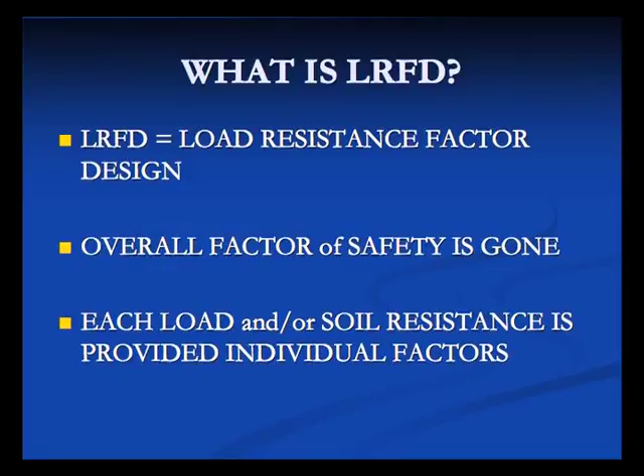Well, the design process isn't the same anymore, both for structures and for geotech. The way the design process works now is, as we're designing that foundation, different resistance factors are applied. When we don't have great confidence in something, that gets a smaller resistance factor, thereby reducing the load that we put on the foundation. But in areas where we've got good confidence in what we're looking at, that resistance factor is bigger, meaning we can put more load on it. So it's a similar process, but it's just at a different part of the design stage.

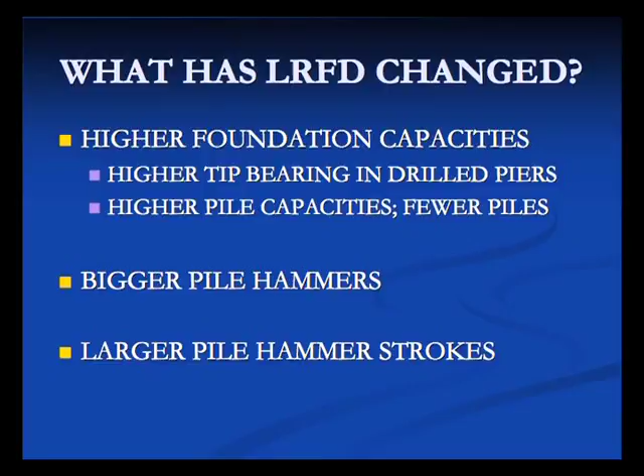How does this affect you guys? Well, as I've said, if you've looked at plans from a recent letting, what you're going to notice is we don't have 60-ton piles anymore. It'd be a rare situation unless you get a bridge maintenance job or a job that sat on the shelf for a few years. What you're going to see is the notes on plans would say piles are designed for a factored resistance of whatever, and it might be 120 tons on that pile. The following note would then say we're going to drive that pile to a driving resistance of whatever, 180 tons or 200 tons. So we're driving these piles a whole lot harder than we ever used to.

When you drive a pile to 200 tons, it takes a big hammer to drive that pile. When I first started 6 years ago with the state, it wouldn't be uncommon for a contractor to submit a Delmag D12, which is a 2.5 kip ram, and a Delmag D19. Well, as LRFD has come out, the D12 goes away because a 2.5 kip ram is not enough to get anywhere close to 150 tons on the pile. So with higher pile loads, you see bigger hammers, and with bigger hammers, you see bigger cranes.

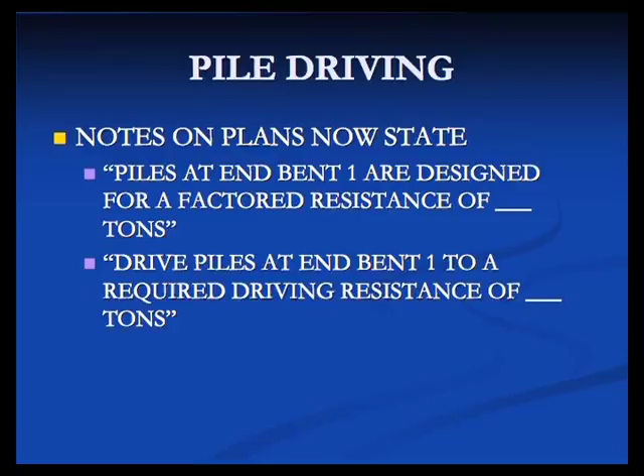It takes a lot more stroke, even if you've got a Delmag D19-42 4-kip ram. It takes a 7 or 8 foot stroke to proof out that pile to 200 tons, if that's what we're looking for. Okay? So your job is going to change if it hasn't already. Those are the new notes that we use, as I stated before. Nothing is bearing anymore, it's all resistance. Same meaning, different words.

The skinny on all of this is, if you look at that first note that says the foundation's designed for a factored resistance for piles, if you take that factored resistance and divide by 0.6, you get the driving resistance. Okay, so that's the skinny on the resistance factor. And you might say to yourself, well, piles used to be designed for a factor of safety of 2, so shouldn't that resistance factor be 0.5 instead of 0.6?

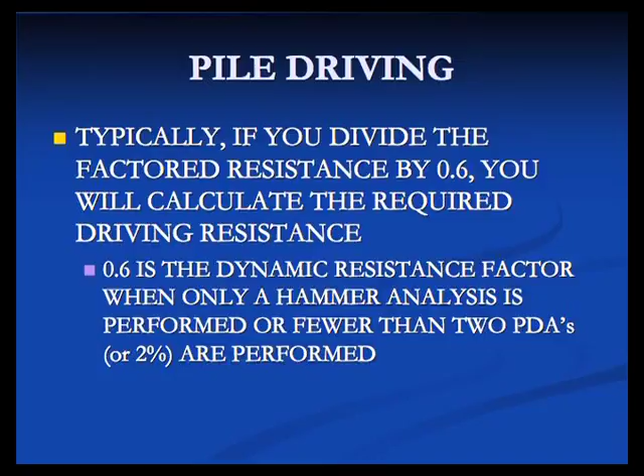Well, a lot of research went into that, and AASHTO set that resistance factor. Now, we varied away from AASHTO a little bit and are using that 0.6 factor. And just so you know, a lot of probability and statistical analysis was done to come up with that 0.6. Ultimately, it's the same as we've always done it, but it just looks a little different.

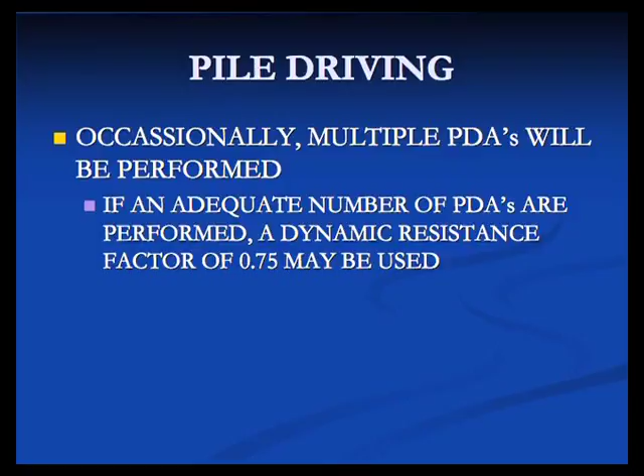If we run PDAs, the current 5th edition of AASHTO prescribes at least two PDAs, or 2% of the piles, and we have very few projects where 2% will be more than 2. So if we run 2 PDAs, again, it comes down to a confidence level with those resistance factors.

So if we've got, say, 12 end bent piles for a job, if we drive 2 of those, we've got pretty good confidence on the remaining 10, that if we use the data from those PDAs, the other 10 are just like what we did with the PDA. So our confidence level goes up, and our resistance factor goes up as well, or our factor of safety can be reduced, and so we use a resistance factor of 0.75, which means we run 2 PDAs.

If we incur the cost, roughly around $3,000 for a PDA, what that buys us is a little more capacity, or the same capacity with less risk of damaging that pile. Okay. In North Carolina, when you're driving piles, there are typically 2 conditions.

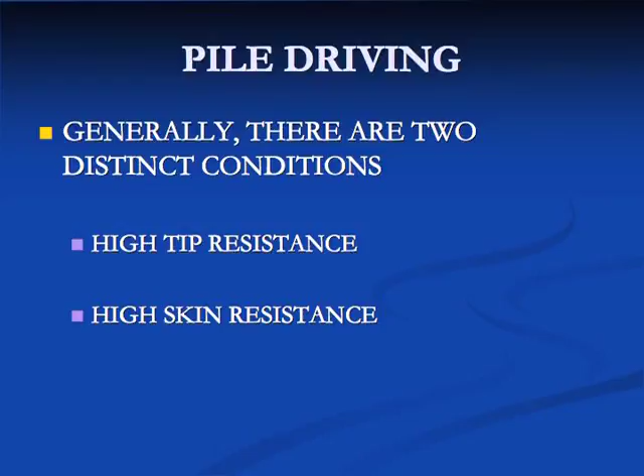You've got high tip resistance conditions, which is really my part of the state, the western part of the state. Most of Division 8 and everything west, 7, same way. Anywhere that you don't have coastal plain, they tend to be tip resistant piles. From 8 and east, all the coastal plain divisions, they tend to be skin friction piles. Big sections, pipes, square concrete piles, they're called displacement piles. As you drive them in the ground, they're displacing material, so you develop a lot of skin friction by doing that.

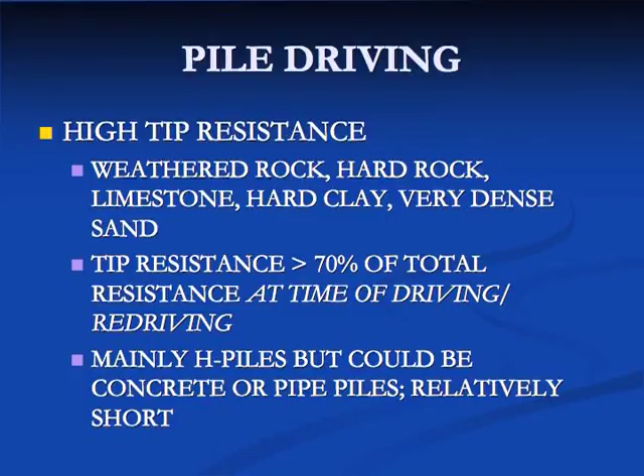Tip resistance piles tend to be driven to something hard, weathered rock, really hard clay, dense sands. They tend to be relatively short piles. In my part of the state, piles will tend to be from 10 feet to 30 feet. When you get longer than that, it's a rare condition.

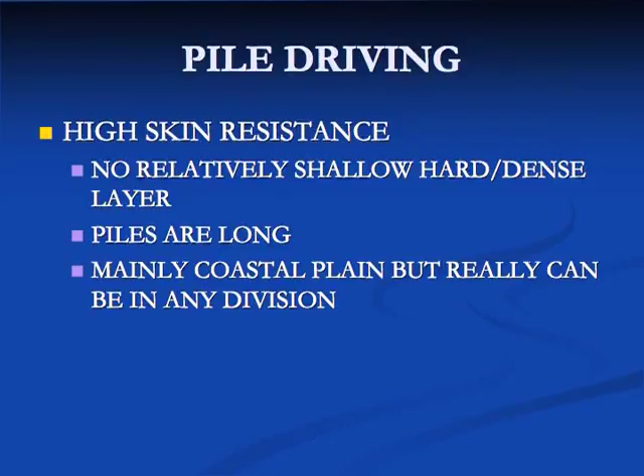The eastern part of the state, coastal plain sections, they tend to be skin friction piles, really long, 70, 80, 90 feet long. It takes that much pile to start displacing the material to develop all that skin friction, plus the stiffness of the soils in the coastal plain tends not to be as high, so it takes a really long pile to get the tonnage that we're looking for.

Thing to keep in mind, west and east in this state is fairly distinct, but there are places, I've seen Stokes County where we had 80-foot long piles, nothing to tip those in. Hendersonville, over in 13, same situation. So just because you're in the western part of the state or in Piedmont ground doesn't mean that you're not going to end up with skin friction piles.

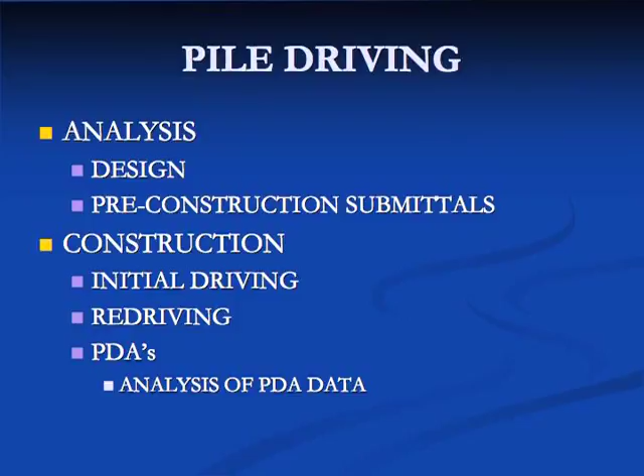Pile driving is broken into the analysis side, the design phase, where you guys really never see the work going on. You've got pre-construction submittals, the hammer pile driving system that the contractor submits, and then the construction side, which you guys are always involved in.

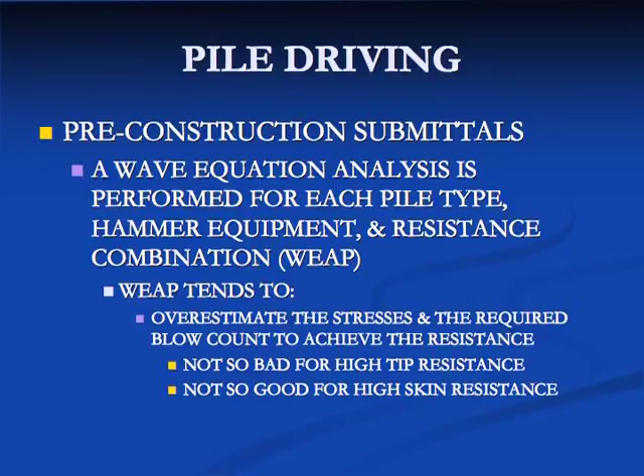Once the contractor wins a contract, typically one of the first submittals they make to us is the hammer submittal. And that hammer submittal will list at least one hammer, typically two. And it's everything about the hammer pile driving system. It would include the helmet weight for the hammer, hammer cushions, and if you're driving concrete piles, it may have a pile cushion, a plywood cushion for driving concrete.

We use a software called WEAP to look at that pile driving system. And it's not only the hammer, but the weight of the pile also figures into all this pile driving. If you've ever been on a project where you had 20-foot piles in bent one and 80-foot piles in bent two, those two driving tables are totally different. Well, an 80-foot long 12 by 53 is tremendously heavier than that 20-foot long 12 by 53.

So if you imagine running into something that weighs 4 times as much, it takes a whole lot more energy to move that. And that's why those two driving tables are so much different. That hammer has to work a whole lot harder to shove that 80-foot long pile into the ground.

WEAP is made by a company called GRL, who have developed research for the last 40 or 50 years in pile driving, using a database full of hammers and their typical operations and everything else. When a contractor submits, say, an ICE I-19 hammer to us, we go in that database and throw it into the software. That software will analyze that hammer operation and provide us the driving table that we give to you guys.

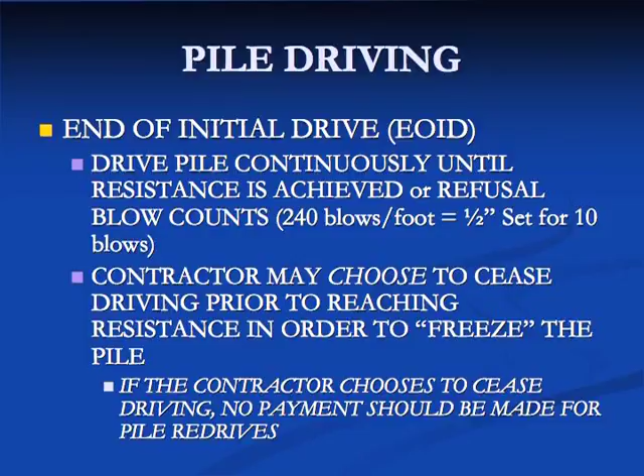Okay? Let's say we had a contract where the average pile length is 40 feet. There may be times that a contractor, when he gets to 40 feet, may choose to stop. Let's say we don't have bearing. The contractor chooses to stop and come back the next day and try to achieve bearing, letting that soil set up, trying to freeze that pile. If the contractor chooses to do that, then we don't pay the contractor to come back the next day and redrive that pile. That does not constitute a pile redrive, correct? Everybody agree with that? Contractor can choose to stop. If he chooses to stop, that's his choice, and we don't pay for the pile redrive.

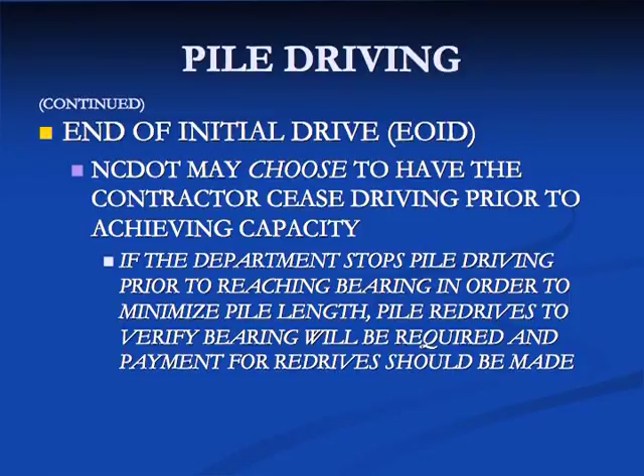On the other hand, again, same contract, 40-foot long piles. If we get to 40 feet and we're getting nowhere close to the sets for 10 blows that we're looking for, we can step in and ask the contractor to stop driving. Okay, we're trying to save money. We're trying to hit the contract length. We don't want the residents to suffer project overruns and all of that. If we step in and ask the contractor to stop, then we're going to say we're going to wait 24 hours and come back and redrive this pile. If we do that, then when we go back and drive that pile, we will pay him for a pile redrive. Okay?

Are you seeing more redrives up here in this part of the area, Dean, because of the bigger hammer? No. I would venture to guess that at least 90% of the projects in all the divisions represented here, until you get into part of Division 8, where you're into the coastal region, most of the time we're driving to weathered rock or something. But you had the job up in Stokes with 70-foot long, 80-foot long piles. Are you seeing damaged piles from the bigger hammers once you get to rock?

No, but understand too that when we look at a hammer submittal, let's say we've got 10-foot long piles driven to hard rock. My philosophy is I would prefer a contractor at that point to submit a D12, not a D19-42, because if you can get a pile to rock, we don't really care what the blow count is at that point. We're calling it good, able to get any kind of capacity we're looking for. So we would rather have a smaller hammer with less potential to damage that pile. A really small hammer at that point is a good idea. So we look at things like that to make sure we're smart in driving the pile.

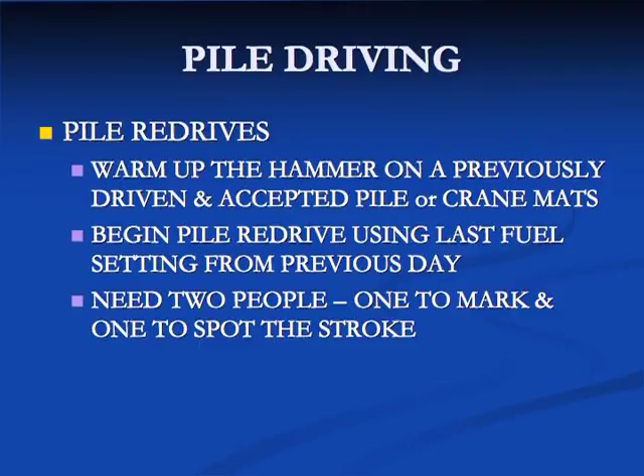We'll talk about pile redrives. This is typically for H piles that are driven and have nothing to stop that tip. A lot of times you'll be in a pile redrive situation. The thing to keep in mind when you're trying to redrive an H section is if you hit that pile more than 3 or 4 times with strokes that aren't anywhere close to what you're wanting to see, you've wasted that opportunity and you're going to have to come back the next day and do it all over again. So the most important aspect of a pile redrive is making sure that hammer is smoking hot, ready to go when we try to hit that pile.

The best way to do that is if you finish the previous day's operations. We're sitting on an end bent, got 6 piles. We've driven all 6 of them, 3 of them got bearing, 3 of them didn't. The best way to warm up that hammer is to go to those piles that we accepted the day before and set that hammer on top.

Now, your job as the inspector is to kind of know at the end of the previous day what our fuel pressure was for that hammer. And when I talk about fuel pressure, do y'all all know the little jack that sits out there and he pumps that thing up and it's got the dial gauge on it? Okay. The higher that pressure is, the finer the fuel into the chamber, the explosion chamber for the hammer. The finer the fuel, the bigger the explosion. That's why the higher you pump it, the higher that ram is.

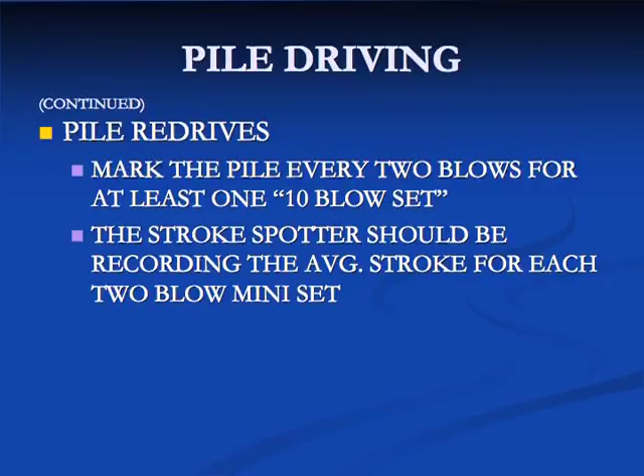But we're going to tell the contractor that we want to mark that pile every 2 blows. Okay? We're still going to drive it the 10 blows that we normally would, but we want to mark it every 2 blows. Your job as the stroke spotter, if you take my advice and you're spotting the stroke, is every 2 blows that you see, you're averaging those strokes and you're writing them in your diary. Okay? So when that 10 blow set is done, you can walk back over there and measure and write the 2 blow sets out beside those strokes.

Okay? If by chance, and this would be a rare condition, consider yourself lucky at this point. If you get to the end of the 10 blows and you look at your driving tables for that given stroke, and you find out that the set for 10 blows that you just got on the redrive is less than what's in that table, great, we got bearing. Okay? Just like any other drive. I'd venture to guess that 95% of the time that isn't going to happen. Typically, we're not that lucky. If we're in a redrive condition, there's typically nothing anywhere close to the toe that's going to stop that pile. So

what we're going to do then is we're going to look at stroke and what our penetration or set is for each of those 2 blows. And the way you figure out what a 2 blow set is, you've got a 10 blow set, and let's say you look at the table and it's 1 7/8 inches. If you take a 10 blow set and you're trying to convert that into a 2 blow set, you divide 10 by 5, and you get a 3/8 inch set for every 2 blows. All we did was broke that 1 7/8 inches into 5 sets. Okay.

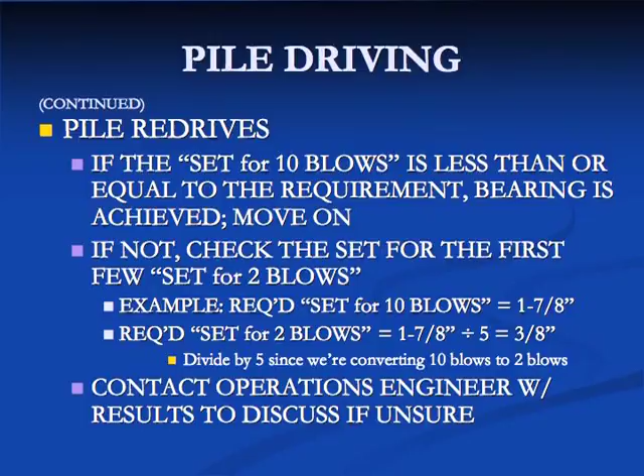What you're going to find out is if you're looking for a 3/8 inch set for 2 blows, in the first 2 blows, in a given stroke, you're going to see maybe a 1/4 inch penetration. Okay, so that's less than 3/8. The next 2 blows, blows 3 and 4 in that 10 blow set, it's probably going to be 3/8. But after you hit that 3/8, it ain't going to be 3/8 again. It's going to be half, 5/8, 5/8, 5/8. So if you added all those numbers together, we wouldn't get to the 1 7/8. It would not look like a passing bearing check.

But what you need to do at that point is call the bridge construction engineer, call me or Chris, whoever you're supposed to contact. Have that data ready. What your stroke was in the first 2 blows, what that penetration was in the first 2 blows, so on and so forth. We'll make that decision. I won't saddle you with that requirement. We'll make that decision. You might say, well, that's a little bit hokey. That's like some black magic you guys are pulling out.

Well, what you got to understand is when a PDA is performed, that's exactly what is done. If you've ever been part of a PDA, you might do 2 or 3 10-blow set checks. When that data comes back, they're not looking at all 10 blows. They're grabbing one blow count out of that set check and saying, this is our representative capacity. Okay? That's exactly what we're doing.

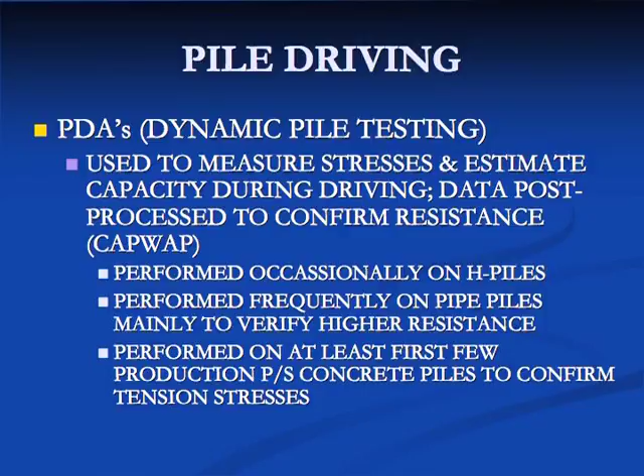When we go into a pre-driving analysis of the hammer system, like I said, we've got a database of hammers. We choose that hammer, and that database is the collection, for any given hammer, of what GRL has seen that hammer do over the years. Okay. We also estimate soil parameters in that analysis because the dirt matters. What we're driving it through matters. What a PDA helps us do is refine, make those soil parameters better. When we get better parameters, we get better driving tables.

And if you can imagine, as I told the group yesterday, not every Delmag D19-42 operates like the next one. Just like you and your buddy might have the same vehicle and they don't operate the same. Well, that's all a hammer is, a combustion chamber. So what the PDA helps us see is if I take a 4-kip ram out of a D19 and I raise it 8 feet, 8 times 4, 32, that's supposed to be 32 foot-kips of energy hitting that pile. But the PDA tells us exactly what that energy was, and it's not going to be anywhere close to 32.

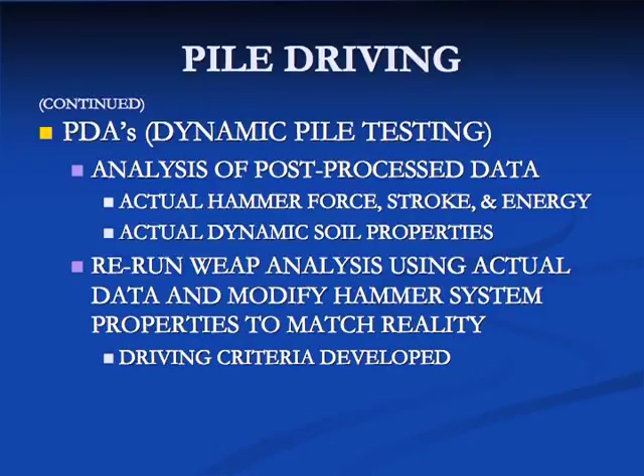So if we get into a situation where we try to drive a pile, we don't get bearing, we try redrive, we don't get bearing, we come back out and we run a PDA, you might find out that if we gave you a criteria of a 7-foot stroke and 48 blows per foot, when we run that PDA for that 7-foot stroke, it might be 35 blows per foot. Again, we overestimated previously. PDA helps us get it right the second time around.

Okay. So here's your typical construction summary. For H piles, I think across the state, Chris's region included, the process is for an H pile, we're going to try to drive to get the resistance or get the bearing that we're looking for. If we don't get that bearing, then we're going to tell the contractor to stop. We're going to come back at least 24 hours later.

We're into driving at 4 o'clock in the afternoon. We might come back at 10 the next morning and hit them again. Okay? We're going to redrive them using those 2 blow sets. If we then by chance don't get the redrive bearing that we're looking for, then we're going to have to call the PDA out there because the PDA will let us analyze truly what the dynamic capacity of that pile is, okay?

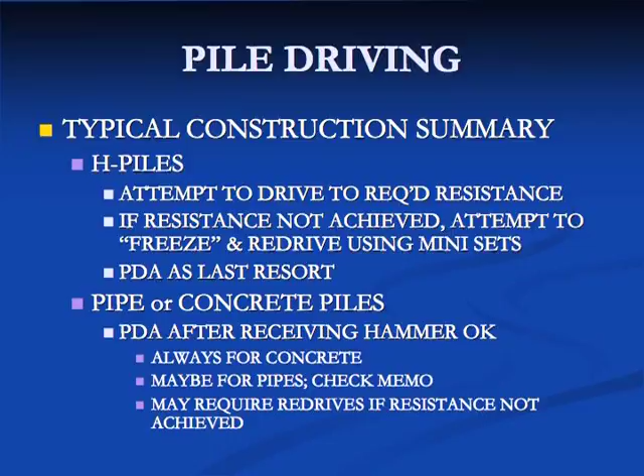Maybe for pipes, again, checking our memo. If you get a memo that has a driving table on it, you're not running a PDA, you're driving those piles. Okay. Those two, pipes or concrete, may require redrives. If you're in a redrive condition with a concrete pile or a pipe pile, the two blow sets won't matter. Those piles won't take off like an H pile will. So we're into the 10 blow sets. Okay?

Does anybody have any questions about pile driving? I'm going to try to do Chris's portion of this as best I can. Does anybody have questions about pile driving? Can you touch on, you may have, I'm sorry, minimum tip? Could you touch on that a little bit? Just briefly. Briefly, yeah. Because these guys may not have as much. Lee's just telling me he didn't see that a lot in his plans, but we've got that more in our area. But I just want to make sure they understand that and look for it in their plans.

How many folks have ever had an interior pile bent on a bridge? On those bridges, there's always a note on plans that says not only drive the piles to a certain resistance or bearing, but also drive them to a minimum tip elevation. I'll talk a little bit about it here. These are all Chris's pictures, mainly the eastern part of the state. I think he's got some Division 7 pictures in here.

But where the minimum tip comes in has nothing to do with axial capacity, vertical capacity. It has to do with the fence post bending over condition. So part of the geotech analysis for a pile bent is how far that pile has to get in the ground. Structural design provides us not only the vertical load but the horizontal load on that pile. So geotech looks at how far that pile has to be in the ground before it wants to bend over, just like a fence post. So that's where the minimum tip comes in.

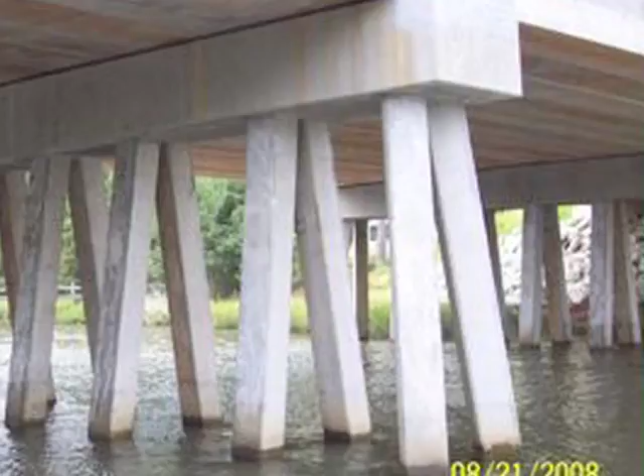But in the design process, because of a hard layer underneath, they couldn't get the big 16-inch concrete pile deep enough for one row to work. So they had to put essentially a frame in there, double row battered piles, to help with that pushover that bridge wants to put on those foundations.

Lateral load on a bridge comes from two different directions. If you look at a bridge in elevation, the wind or water pushing against that bridge. That direction through the bridge tends not to be the bad direction. The bad direction tends to be along the bridge, and where that affects things are your bearings and beams sitting on those seats and getting those bearings in the wrong position, essentially.

Those forces, and you might say, well, where does that force come from? That force comes from the tractor trailer rolling across that thing and locking up its brakes, trying to shove that bridge along. So that direction, from a structure standpoint and a geotech standpoint, tends to be the direction that gets looked at the most. Through the bridge, you've got that bent sitting there, and that big frame that helps minimize that kind of movement.

Okay. You got 12-inch pipe piles at an end bent. How many folks have ever had pipe piles at an end bent? That's a rare condition. Looks like they're getting ready to build an MSE wall out front because you can see all the piles sticking up.

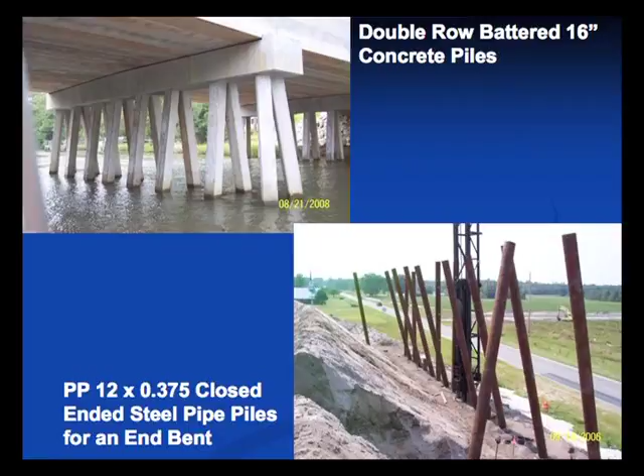Another double row condition. This time it's H piles, battered. Again, limited penetration for that H pile, forcing them into a double row condition. Those piles are galvanized.

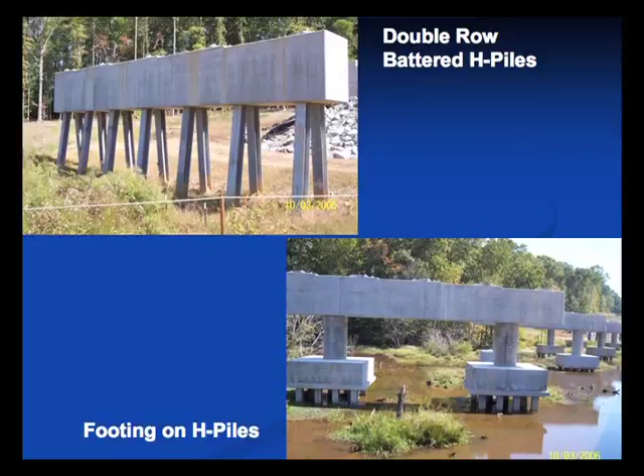Down in the bottom right, you've got a footing on H piles, and it's really critical to make sure when you're driving those piles that you maintain good alignment. That means we need those leads to be checked for plumbness both directions.

Because especially when you do a footing on piles in conditions like this, you don't want to get a pile out and not be able to get your platform footing form on top of that. So it's real important to make sure that the contractor's doing his job, making sure he's plumbing those leads in both directions.

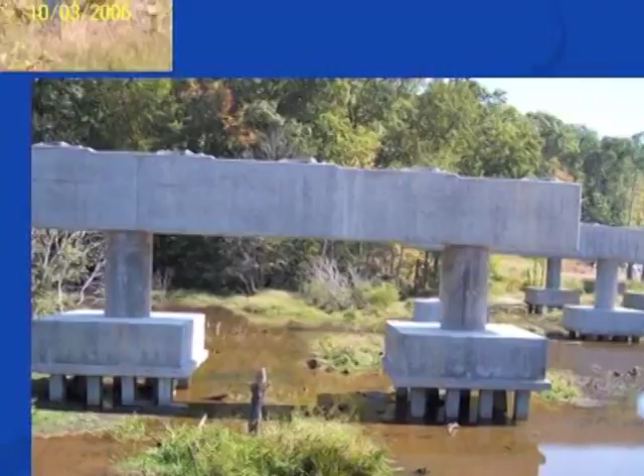Dean, that little slab on the bottom of those footings there is really not something that's in our plans. That was something the contractor proposed and got approval to do. And so it was a sacrificial slab they decided to use for their false work, or for the bottom of the footing.

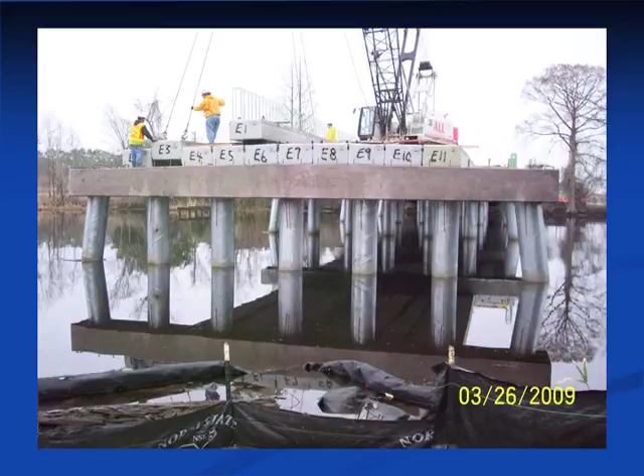The water elevations fluctuate quite a bit, so if they had to use an extensive set of false work down there, it was going to be difficult if the water level came up to get that false work out. So they came up with a method to put that slab in and leave it in place. So it's got some reinforcing steel that actually ties up into the footing. We've used that in a few places in our area.

This is an example, top-down construction, big pipe piles. How many folks have ever been an inspector on a top-down construction job? It's real common where Kevin's from, where Chris covers. And the way it works is the contractor drives his interior first bent piles, forms that cap, drives his end bent piles, gets that cap done. This is a cored slab bridge, and he sets his cored slabs across those two bents, right?

He's got his end bent number 1, he drives his crane out onto the bridge at that point. He drives bent 2, he progresses across the bridge that way. The last bent he drives is end bent 2. Okay? What that allows is, one, it's pretty fast. I mean, it's a good way to do it. It saves us money, saves the contractor money. He doesn't have to build a work bridge, causeways, or anything like that.

I think you may see a lot of this. I don't know if you guys have heard, but we've got sub-regional tier bridges now. If you've been on a bridge where we don't have the typical reinforced bridge approach fill with all those different layers of fabric, we're putting a little wedge of stone underneath our approach slabs. Those are called sub-regional tiers. Those are low traffic volume, low risk bridges that we're trying to save a little bit of money on.

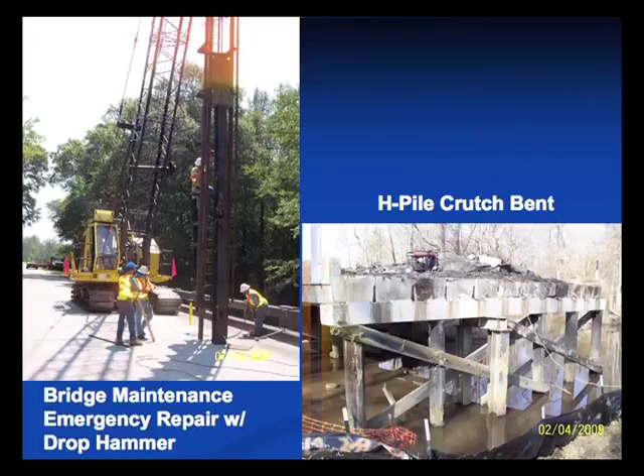These are 2 pictures of bridge maintenance work, and bridge maintenance tends to do things a little bit differently. They don't really have the capabilities to go out and rent a big diesel hammer, and a lot of bridge maintenance areas have drop hammers. We don't allow drop hammers on TIP jobs, but when bridge maintenance has a bridge that they need to shore up just a little bit at a bent, they'll bring out a drop hammer, and the way a drop hammer works is exactly the way it sounds.

They lift up this big ram with the crane, and they cut loose the brake, and it falls and drives, in this case, an H-pile. And so they're building a crutch bent. They've got piles going bad, maybe timber piles that are rotting. So they go in there and drive piles either side and build a little crutch underneath that bent to try to get 20 more years out of this bridge.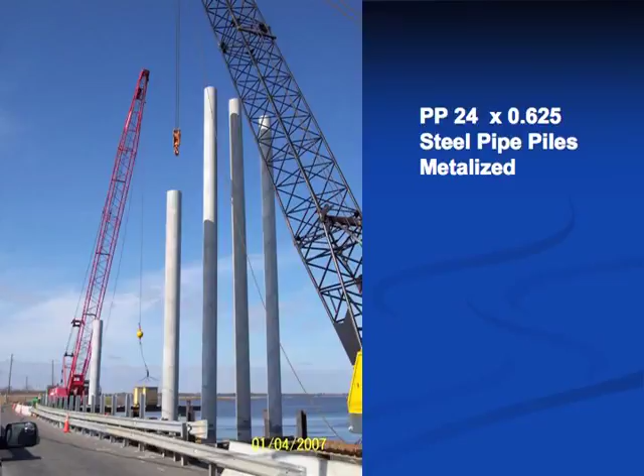This is an example of how long piles tend to get down at the coast. Big 24-inch pipe piles. These are metallized piles. Way down east where you have to deal with saltwater, brackish conditions, piles tend not to be galvanized. They tend to be metallized, which is a harder, better corrosion protection for piles.

Randy, do you know how much longer metallization provides than galvanization? I do not.

I know it's quite a bit more expensive, but it is much more durable. Yeah. Very difficult to repair. There's not very many people who come in who can repair them. Metallization is sprayed on, where galvanization is dipped.

When the steel manufacturer provides the piles to the galvanization company, they've got long vats of zinc alloy, and they take that pile and they dip it in there, and that's what provides galvanization. But metallization, it looks like textured ceiling to me. I mean, it's sprayed on. It kind of looks like that.

But if you can imagine driving a pile through the ground, you need a coating that kind of resists all that abrasive action that's going on around that pile. Down east, again, you tend to get really long piles, and this is an example Chris has for installing piles initially with a vibratory hammer.

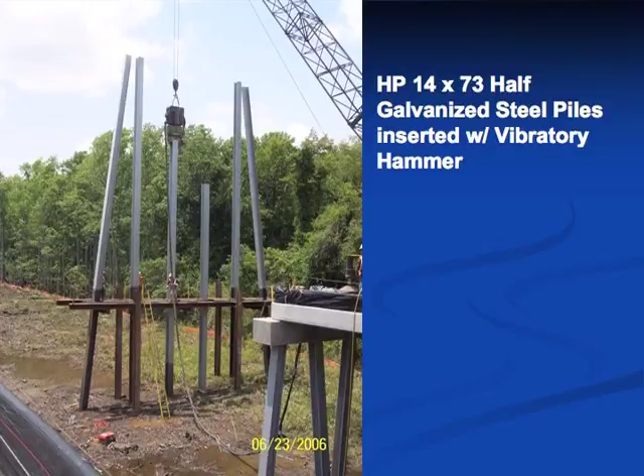The contractor would take those two different piles, splice them together, and there should be a note on the plans that requires the contractor to get the bottom of the galvanization to a certain elevation in the ground. Okay? And that elevation is deep enough in the ground that the black steel won't corrode, and we still have protection for what's exposed.

Typically, when we get a project like that, let's say the 20 foot's a bad example. Let's say we've got 60-foot long piles. That galvanization elevation that we need to get to may not be well known before we start driving the pile. And so we may recommend to the contractor, we can't make him do it, that the first pile he drives, let's say the middle pile in a bent, be fully galvanized so that we can figure out exactly where we're going to end up. That way we don't screw up the first one.

If we drive that first pile and he's got in his mind that he knows exactly where everything's going to end up, we drive that pile and the galvanization, we've got black steel 5 feet above where it's supposed to be. We've got to then extract that pile and then go at it again.

Okay. You want to talk about pay items for that? I think with this, as I understood it, this used to be two separate pay items. For the same pile, like he was just talking about, sorry for stepping out, the bottom part being black steel, the top being galvanized, we used to pay whatever they drove for black as black, and the galvanized portion was paid as galvanized.

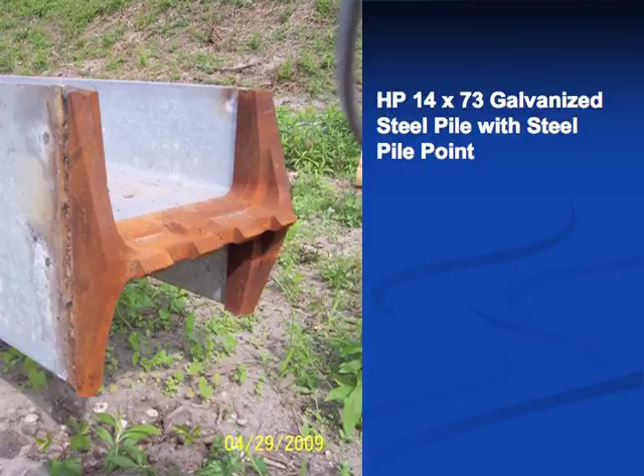This is a picture of a steel pile point, and it is not galvanized because it's sacrificial in the driving process. So even if you've got galvanized piles on a project, steel pile points will tend to come out just black steel. Is the contractor allowed to make their own pile points? No, there's an approved list of pile points that he would choose from. They're fairly expensive, but they're really important.

You know, in my part of the state, especially if you're driving to rock or driving to a high tonnage, pile points are real important, because if you've got a 250 ton 14 by 73 pile going in the ground, maybe 300 ton 14 by 73, it takes a lot of penetration in the weathered rock to get that kind of tonnage, and it's pretty likely that during that penetration those flanges are going to start to bend. And so that pile point helps the penetration, plus it stiffens up all those flanges.

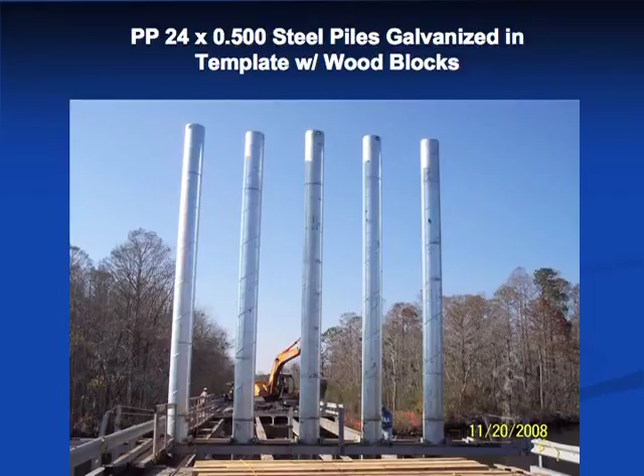Yeah. In a hard rock condition, they're real important, especially if you've got a sloping rock, to keep that pile from wanting to walk that rock. This is an example of, I'm not going to talk about the holes, I'm going to leave the holes for Colin. This is an example of galvanized pipe piles, and the one thing that I'll talk about, and I'll leave the BCEs to wade into the manure of torch cutting holes.

If you're working with coated piles, whether that be metallized or galvanized, it's important that when the contractor sets up his template, that we provide some cushion for those piles through that template. And the best way to do it is with wooden blocks along that template. He may still have steel angles providing alignment for those piles, but we want wood blocks sitting inside those steel angles on his template, so that as that pile squeals its way into the ground through that template, we're not rubbing off the metallization or galvanization.

So keep that in the back of your mind. Make the contractor go the extra mile. We're paying for that galvanization. The last thing we want to do is wear it off before we put it in the ground. Now the BCEs are going to talk about the torch cut holes at the top. How many of you have seen that?

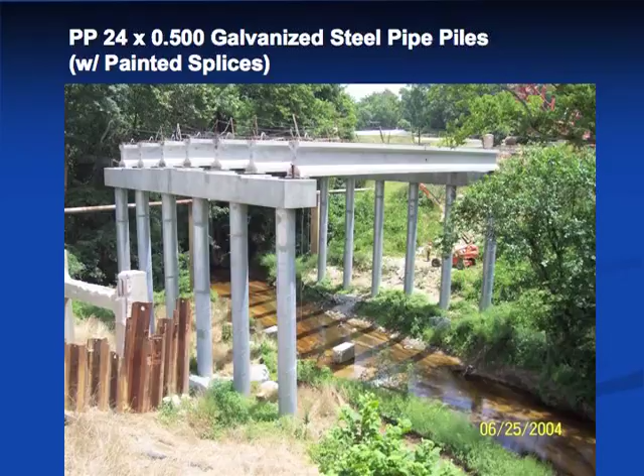They were doing the same thing with a pipe pile. We kind of caught it after the fact, but we really put a stop to that. We don't want to allow that anymore. Now, Dean touched on issues about preventing damage. You can see the damage right here to these galvanized piles. Well, sometimes it's going to happen.

From what these guys have been telling me, after they do a 12-month review, what they're seeing is that areas that have been touched up are having to be repaired, because they've got rust bleeding through. So if you do have to touch up, make sure that the paint they're using meets our specifications. In addition, when they bring that material out, it should be a two-part epoxy zinc-rich primer. They should have an application data sheet.

This application data sheet will tell you what kind of metal preparation is required and what kind of ambient conditions are required. So if the humidity's too high, they're not supposed to use it. Also, they're supposed to put two coats, and the data sheet will tell you what kind of curing time is required between coats.

The coatings on these piles are expensive. We want them on there for a reason. Dean hit on the wood blocking to protect them, but also storage on the job. Contractors go out there and start stacking them up and don't do a good job of blocking them. You can damage piles that way, just improper handling, so that's something we want to keep on top of. We're paying a lot of money for that coating, and any kind of touch-up paint is never going to be equivalent to the original coating. It's a fraction of the effectiveness.

That's right. Keep an eye on the piles, not only as we're driving them, but inspect what's laying out in storage. If you see anything with damage to the coating, make sure the contractor repairs that. Because once pile driving starts, the last thing on your mind is that galvanization. You can see the painted areas here: splices, nicks, everything contractor painted. Again, what Randy said, make sure that they're doing it right.

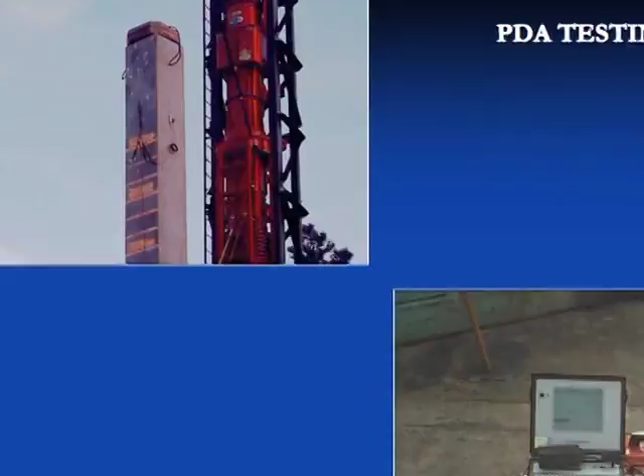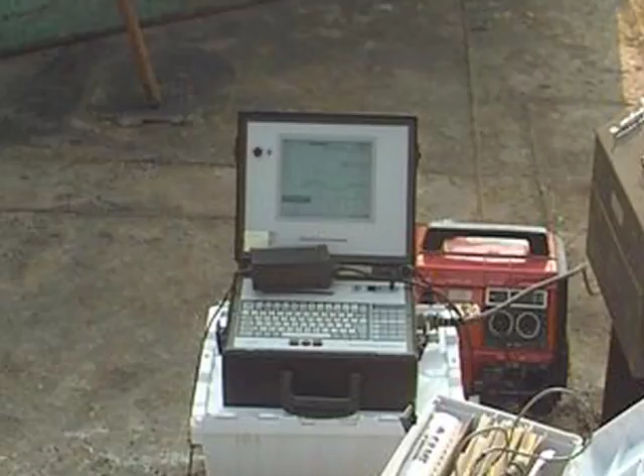So, a few pictures of PDA testing. For those of you that have seen it before, you can see the gauges mounted here. Those are the accelerometers, and there'll be one on this side. On a square pile, you have to do both sides. On an H pile, they tend to hang them from the web, and it's just one. There's the computer equipment, and as a PDA is going on, you can see all the data, the stresses, the capacity. At the end of a PDA, you tend to have a decent idea of whether you've got the capacity you're looking for.

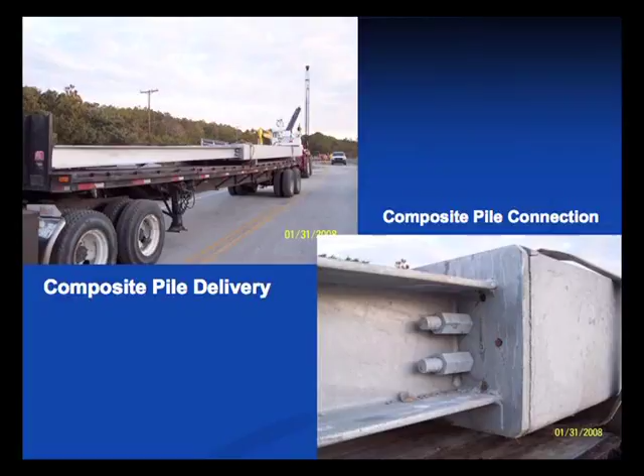Composite piles are something down east; you'll probably never see anything like that here. Concrete piles: again, it's easy to damage concrete piles. If you drive concrete piles and get some cracking or damage, typically we'll cut it off below the damage, and there's a build-up detail in the structure plans that allows the contractor to chip that down and build a new concrete section up.

But as we learned in Division 8, these are all pre-stressed concrete piles. They have steel tendons in them, kind of like a cored slab bridge. If you're driving a pile and you run out of pile, there's no way to make that right. You can't build it up and re-drive it. So it's really important for the contractor to get the right concrete pile lengths out on this project.

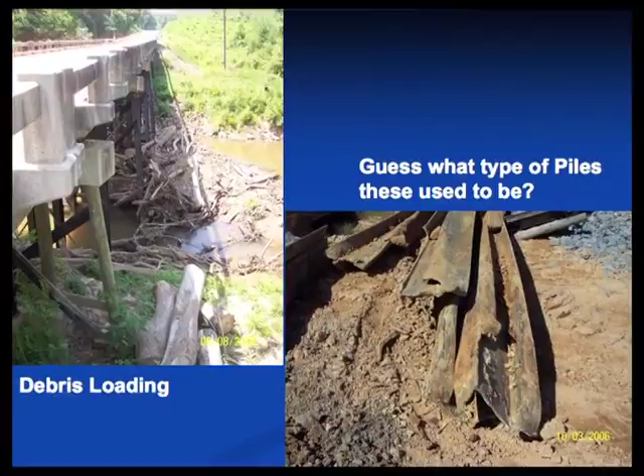Chris got a picture of debris loading over there on the left. You can see all the timber loaded up there. If you're out on a project, keep an eye on stuff like that. Temporary work bridges, temporary detour bridges.

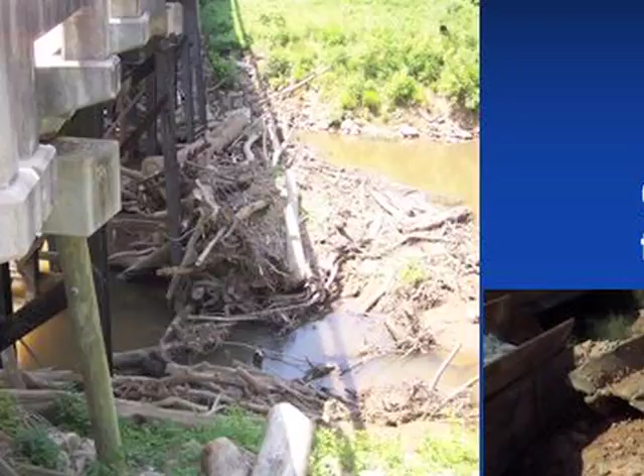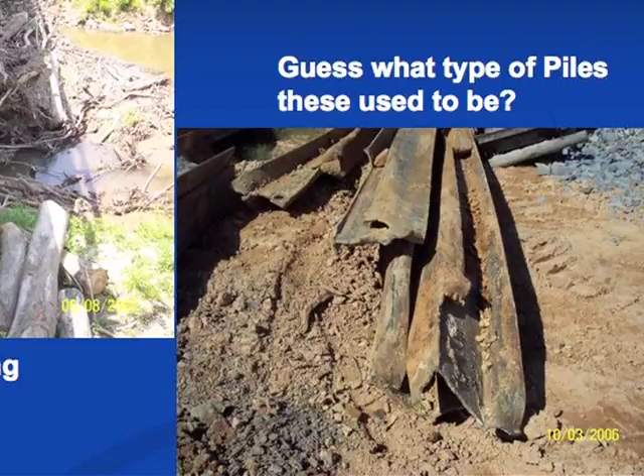I won't get into the discussion of who's responsible for that. These, we talked about driving piles. These are H piles. H piles that were driven through boulders. Looks like sheet piles at this point. So, again, check your borings. Sometimes Geotech doesn't get the borings right. Every once in a while we'll get them.

But if we're expecting, and you know, if you look at bill of materials and you take the average pile length, don't just go by that average pile length. Look at those two end-bent borings. You might have an average pile length of 30, but you might have 25s on one side and 35s on the other. Still an average of 30.

But look at that. Know where a pile's supposed to take up, and if one by chance takes up 10 feet short, don't sit there and keep beating it, trying to get that extra length out of it, because this is what you'll end up with. Something else is going on in the ground, and we've got to figure out what it is.

Dean, real quick on that debris loading, it may not seem like a big deal, but it is. We had a pile similar to that on a work bridge. Now, granted, we didn't have traffic on this. This is just the contractor's work bridge, but it was starting to concern us, and we told the contractor, look, you need to go back to your designer and get their input on this, because we kept telling them they need to get it up, and they didn't want to mess with it.

The minute they talked to their designer about it, the designer said, you need to get the crane off of that bridge till you get that, or you need to reach out from away from there and pick that stuff up and get it out of there now. Because they didn't factor in all that lateral loading on the structure. So that's something we certainly need to keep an eye on, particularly on a detour structure when we've got traffic on it. It may not be designed for all that additional loading on it from the side. So just something to keep in mind.

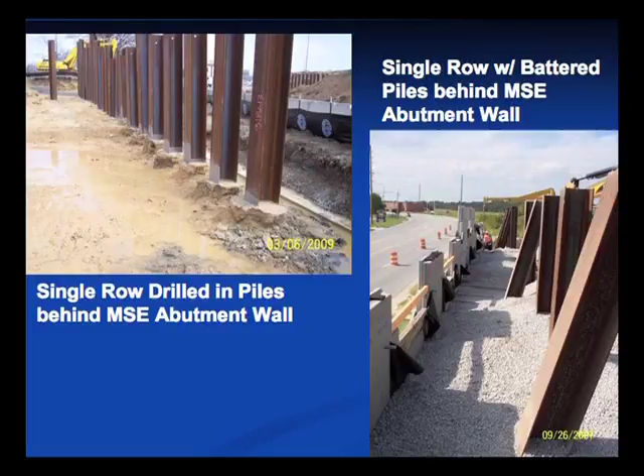Drilled-in piles, won't spend a whole lot of time on that. I would assume maybe some of you have seen pile excavation on the project. We'll drill down into weathered rock or hard rock, stand the pile up inside of it. Typically, when we write a memo out of my office, if we've got pile excavation, basically my instructions are, if you drill that hole, if the hole's clean, if you're in rock, you can stand the pile up inside of it and fill it up with whatever the contract tells you to fill it up with, concrete.

If by chance you get down to the bottom and you can't tell whether the hole's clean or not, you're not sure you're in rock, then we're going to stand that pile up and we're going to put the hammer on top of it. We're going to barely fire that hammer and we're going to hit it until it stops. Once it stops, we're done. We're down to where we're supposed to be. We're going to fill it up full of concrete. Okay?

Piles behind an MSE wall. Thing to keep in mind here is help the contractor think. They won't always listen, but help the contractor think of, if you've got an MSE wall that's 25 or 30 feet tall and an end bent, they're putting those piles in before they ever start building this wall. As you're compacting all this stone around all those piles, you have a tendency to be able to shove those piles around, okay, move them.

So the last thing you want to have happen is you top out that MSE wall 25 feet tall and realize that all your piles are shoved around. So help the contractor think through those things and make sure that he takes the actions necessary to make sure those piles are in the right spot, okay? Sometimes they won't listen.